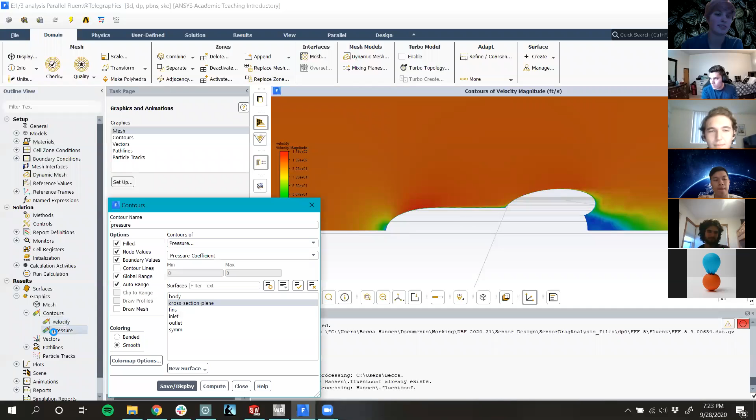We can look at pressure. Again, that stagnation point is going to have high pressure, so this looks all right. Visuals are making sense, but when I go to read out the drag force and drag coefficient, it said it was practically zero. So I've got to work on that.

I don't know why that's going on. Define zero practically - the drag force was like 0.001 or so, pounds. I mean the drag coefficient, not a ridiculous CD naught - CD naughts are usually in the point something range. No wait, that was the force, 0.00 something. Okay, that was the force.

So I'm expecting the drag coefficient to be - well for an airfoil it's going to be like 0.09, right? But this isn't an airfoil, so I don't know, maybe 0.1 to 0.2. Well, airfoils have to generate a lot of lift though, and this doesn't. Well, but the CD naught for an airfoil is really low - the induced CD is higher. Well, even for a symmetric airfoil...

Yeah, at this point I don't know if we're talking CD at speed or CD naught, or if we're streamlining. Well, for a non-lifting body, it should be the same. Yeah, maybe? I'm not saying it's not broken, I'm just providing reference. I don't remember the exact numbers, but it was silly low, sometimes like e to the -5 order. I was like, no.

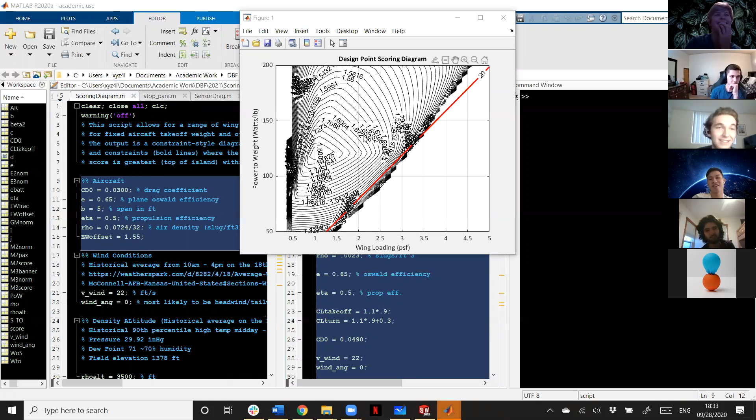Come on, this computer, you can do it. Yeah, it's trying its best, man. This is what I'm working towards.

On the x-axis here we have wing loading, which is basically how much weight the plane has per square foot of wing area. On the y-axis we have power to weight ratio, which is how much power the propulsion system generates per pound of the plane.

Does wing loading, weight per area of wing, take into account the load factor? It does not. The wing loading in this instance is unrelated to that.

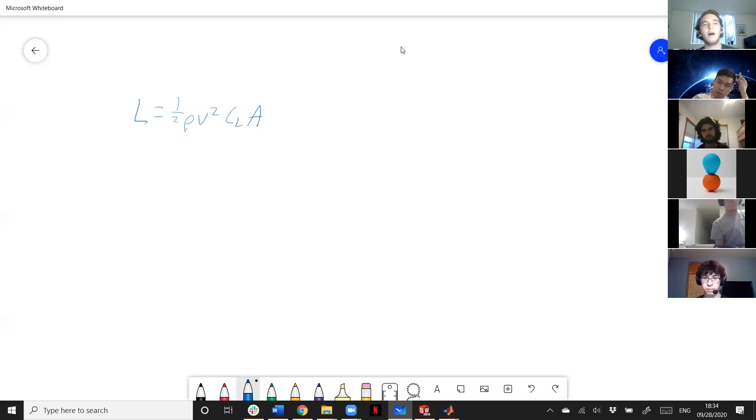That ends up making our equations easier, because in steady level flight we have lift equal to the weight. And so our wing loading ends up being, I guess I should use S for area because that's what people do, a pretty important parameter outside of the context of pulling G's and stuff.

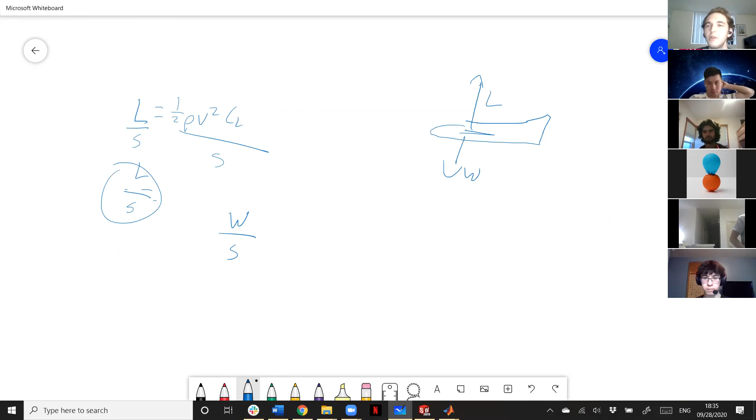So the load factor is only for structural people? The load factor is only for structural. The load factor also comes into account.

No, I don't want to handwrite my MATLAB computer. In some of these scoring functions we have this weight estimate code, which is meh. Also if we end up doing like not a typical balsa buildup, it's pretty useless because it's meant for a balsa buildup. But it comes into account when we...

Sounds pretty fake. It's a little fake.

The load factor comes into account in this code when we estimate the wing weight. Scoring analysis is a lot of fake math until you get something that makes sense, and then you can check it and be like, oh yeah, that works. Which is why it's taken me a minute to figure out what the hell is going on.

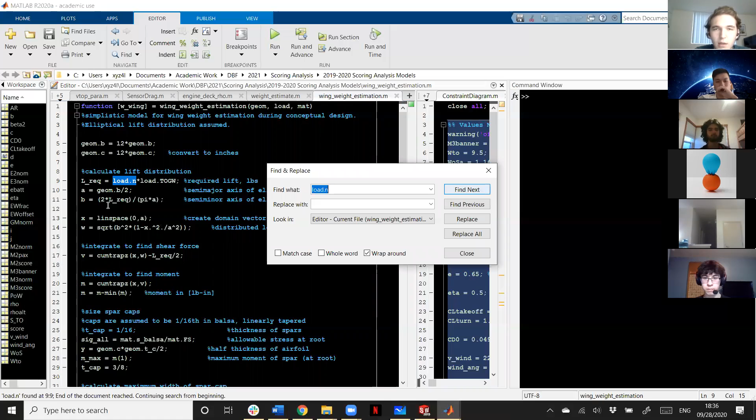The load factor comes into effect here for kind of just a rough estimation for how much force you're going to need on the wing. And so a rough wing buildup just gets a ballpark weight.

Load factor, that's like how many G's you're pulling in a turn. And so it's going to be how strong the wings and everything else needs to be. Because if your wings are only good at steady level and then you try to turn, there's more stress in your wing and your wing snaps.

For 121, I don't 100% know what you guys are doing with 121 if you're actually making stuff. But if you're making the gliders for 121, have a continuous spar so that your wings don't snap.

Affirmative, learned that one from experience. If I remember correctly, you learned that one from experience, Laird. No, mine snapped on crashing because we did something different, and different is bad.

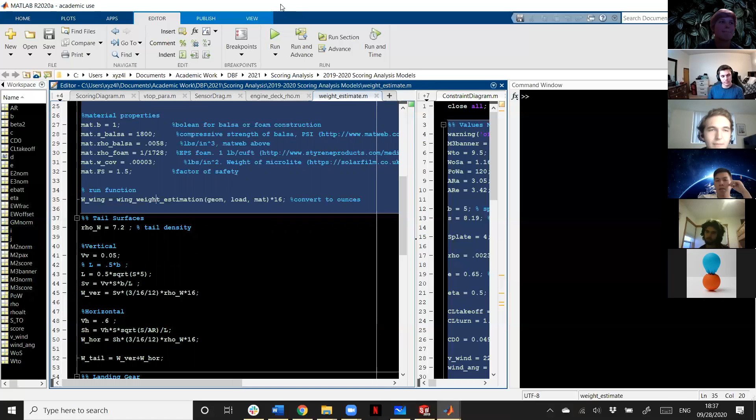Unless you want your wing to snap as a design feature. A rapid disassembling aircraft. If you want a slow takeoff speed, then once you accelerate past a certain point, the tips fall off. We're getting dangerously close to blade of wing territory, or the slip wing thing.

And then the other thing I've been working on, more so before the beginning of the year because I've been sidetracked by scoring analysis stuff, is... what the heck.

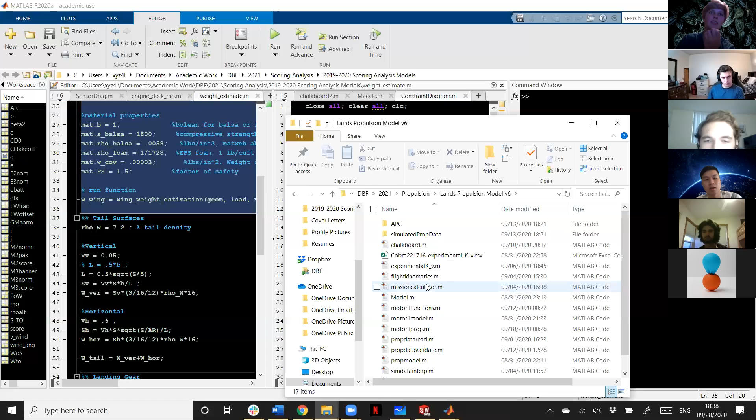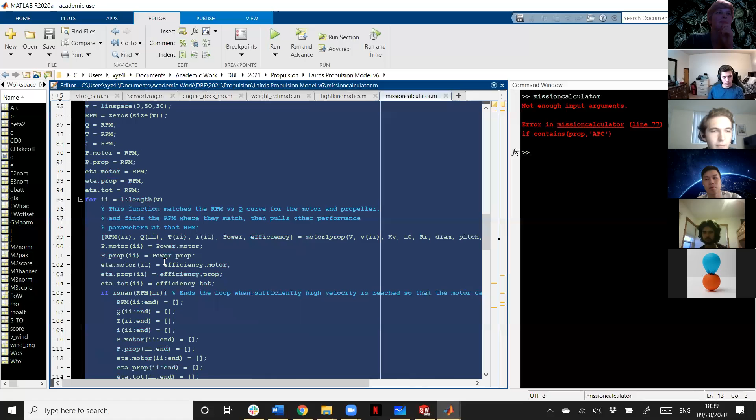This is my propulsion modeling. Never mind, I'm not going to run this because I have everything set up for scoring right now. But it's a preview for what we'll talk about at the propulsion meeting on Wednesday if you're interested. Much code, which if you don't know MATLAB, I can probably use propulsion as a jumping off point to get you started with that stuff.

That was a little more involved than updates usually are. Indeed.

Does anyone else have anything to share with the class?

No, nothing on my end. Jake, anything on your end? My end is dead.

Okay, me too. Sam, do y'all have any planned new tasks? Anybody?

Something, start the proposal. I'm not sure we have any content for that, but I believe in you. Didn't you say you were interested in AVL? I'm not sure if you could start learning that before Laird finishes scoring analysis. Probably, like do planes or analyze what happened last year. And then I'm not sure if it was Cody or somebody else who wanted to also jump in on that. But yeah, if you find the time, getting familiar with that before we need to use it would probably be good.

Okay, does everyone have SolidWorks up and running? Should we open part or assembly? It'll be a new part, I think. You could always just flex and make an assembly and then make a part inside it though. I mean, that's not flexing, that's just how you do it for complex assemblies. Complex as in top down? Well, yeah, but top down is only useful for certain kinds of assemblies. If it's just like two parts together, you're probably not gonna benefit from a top down. But you do you, bro. To answer your question, it doesn't matter.

Okay, I guess I'll start screen sharing then. So if you missed it, last week we didn't get around to starting on the actual pliers tutorial because nobody had SolidWorks, because everyone's a noob. So yeah, I just went over a brief overview, talked about all the different kind of tools you can use. Wasn't very in depth, but I was like, this is a revolve, this is a loft, these are things. So that's that.

Okay, so this is what we're making. There's gonna be, how many parts do we have? Okay, I guess we've got 3-ish parts. So we're gonna start with this guy. So you can do new part.

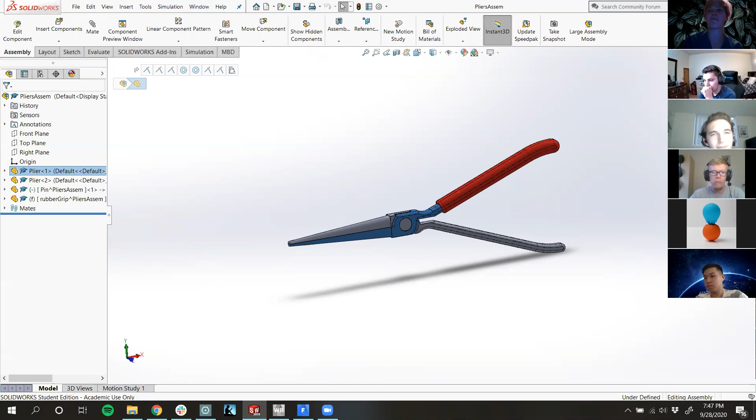Remember when I emailed everybody the thingamajig? Did y'all get that email with the part? Now I gotta find where I put that. It had the other people's names included because it was a group email. I'm sorry I missed that, but can anybody let me know if you don't have the part?

Okay, so is this what y'all's part looks like? I should make it so I can see everybody. Just a little bit slow about this. Okay, I'm gonna imagine that we're good to go.

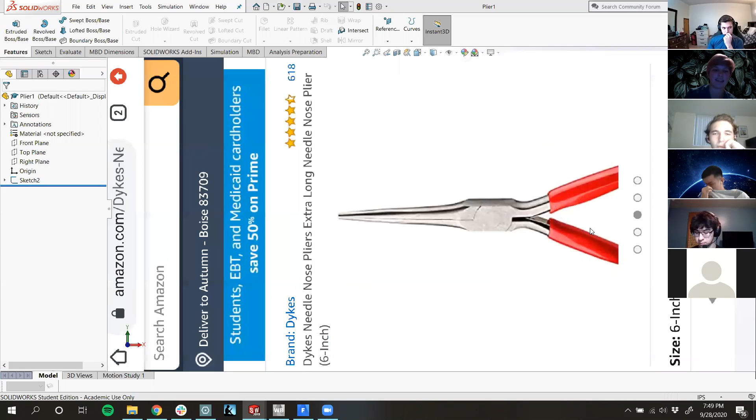So I imported this image, and we're just gonna trace it to start out. Would it be useful if everyone screen shared? No, I think everyone can at the same time, just one per, so I can know how y'all are keeping up. This image is technically on a sketch, so we can just start a new sketch on the front plane. That's a good place to put it.

This origin point is at the pivot where they scissor, so you can outline the pivot there. I'm gonna do another circle that gets to that edge, but I'm gonna make that construction geometry, so it's not gonna go all the way around. I'm only gonna trace this part of the plier because you're just gonna duplicate that part later and it's all gonna be good to go.

So we can make this arc starting at the center, and over here it shows you the different kinds of arcs and how you can use them. It says first the center, then point, then point, kind of.

Is anyone confused yet? I'm sorry, was that a nod from Larry? Did you cut around the edge of the plier again?

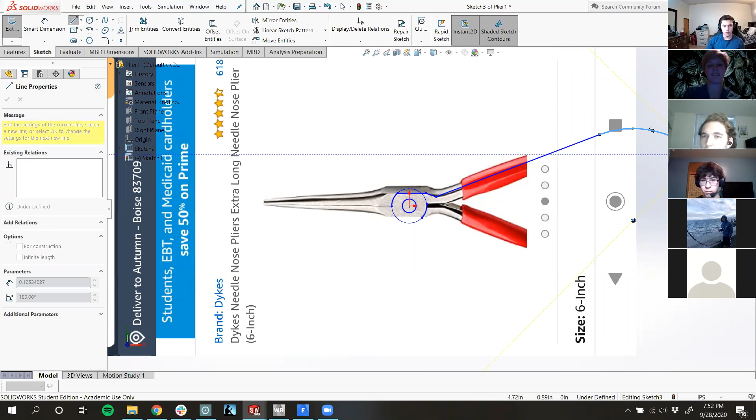Also, when you're drawing straight lines, you can come off of the point and it's gonna start to make a straight line. If you bring it back to the point, it'll make a tangent arc. So that's something, that's a good tip. Yeah, that's a good place to put it.

Can you repeat that tangent arc thing? Yeah, it's just a quick little bit, you can do the arc and then set the tangent, but it's a little bit quicker. So you draw a line, put your point down, go to draw another line, and you just bring it back and that is an arc. Interesting.

Hot tips by Becca. Okay, and we can keep tracing. That's the moral of the story.

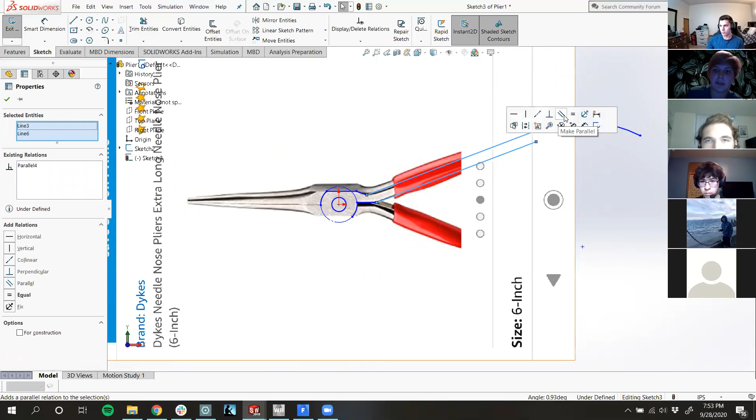You're gonna want these parallel unless you want your thing to be janky. Oh why is it? Okay, so you click, control click, parallel. And then we can line this up, center line is another way of accessing construction geometry. I'm gonna set these two perpendicular to line up those points. Oh, go back, I lost my pretty picture.

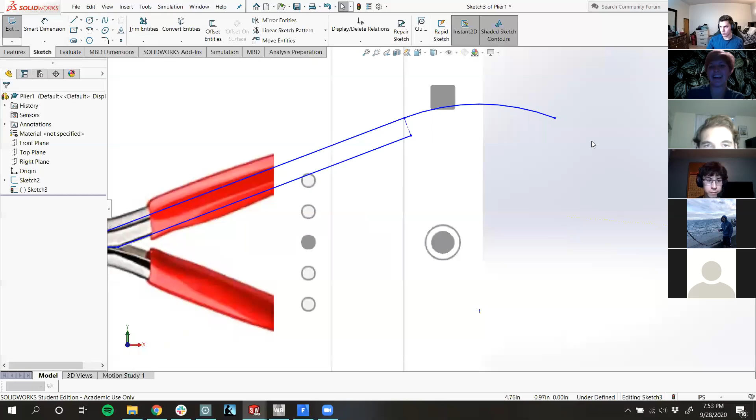Maybe that's what I want. So usually you would have better geometry than this, and these dimensions would be important, but for the sake of it, we're just tracing. I don't think it's important to do this stuff.

Okay, so if you wanted to manually do the tangent arc, because I let go of that point, I'm gonna have to do the arc here, and then we want these two to be concentric, to line them up. Oh dang, no. He's not happy about that. Let's try it again.

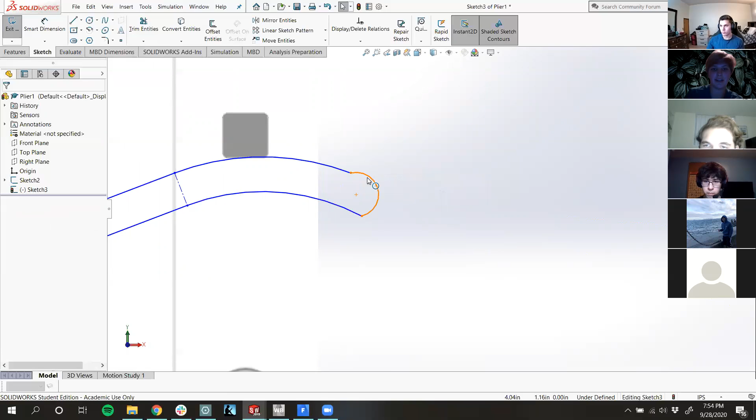Okay, and then for good measure, let's put another one on the end. It really is easier working with a quick little trick there instead of what I'm doing. Okay, pretty handle, how are we doing?

I don't know if everyone's caught up or needs a little more time. How did you get the circle at the end of the handle to line up with everything else? I missed that. Yeah, so I just put another arc on it, and you want it tangent to both of the lines.

Matthew, were you the one that said you've already done CAD before, but not SolidWorks? Yeah, only done Inventor, and a bit of Onshape. Sorry, you were quiet, I missed it. Yeah, I only did Inventor and a tiny bit of Onshape. Okay, cool.

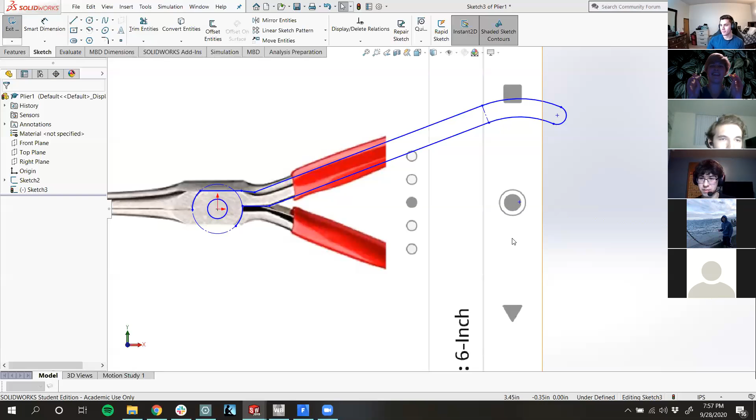I really have no idea how long this takes because it's been a while. I guess I technically started doing this four or five years ago, maybe, and I've spent way too many hours looking at it. So, oh no, just kidding. Wait, yeah. Okay, hold on.

To fill this space, somebody I think intentionally had their sound on during one of my lectures today, and it was, I think it might have been like a TikTok or something. There was this lady saying 2020 has the lowest school shootings so far, way down from previous years. And some kids said, that's because there ain't no school. What are they gonna do, shoot up the Zoom meeting? Everyone was so shocked, nobody had anything to say about why somebody was playing memes in class. The professor didn't know what to say. I guess that wasn't really a funny story.

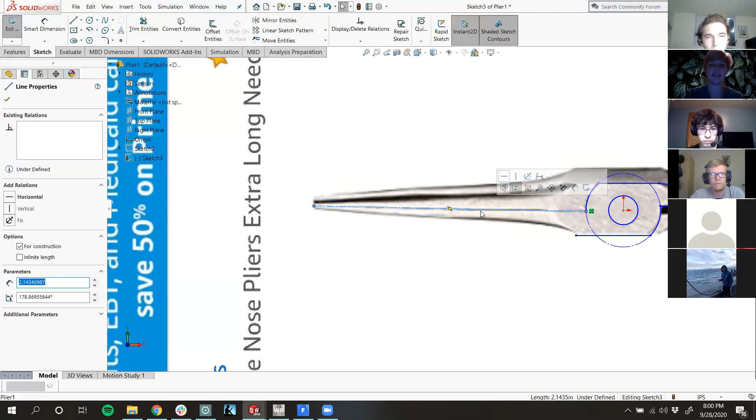So the next thing, we don't actually want to detail this nose because we're gonna do that in a loft. But I'm gonna extend it out here, and make sure it's horizontal. If you want to be quick about it, the pop-ups of what you need always come up to the right, so use that, because you can go all the way to the dialogue over here, but that's slow. So that's just going to set the point where the loft is going to end.

I guess we need to close this shape. I'm not sure if that's how I did it, but... How did you get that line to come out so fast? Which line? The construction line. What do you mean, where did it come from? Did you just make a line? Okay, cool, never mind, I thought that was the thing you said. It comes out to the right, and there's a button to click. I was confused. No, I was talking about making it horizontal there.

No, so in the new version of SolidWorks, you can actually send brain signals and it pops up. I was wondering, yeah, it goes over there. Gotcha, and then you just check the checkbox. You're like, yes, that's the power of 2021 SolidWorks, Slade. Oh shit, no I'm not, shit, I got the old version.

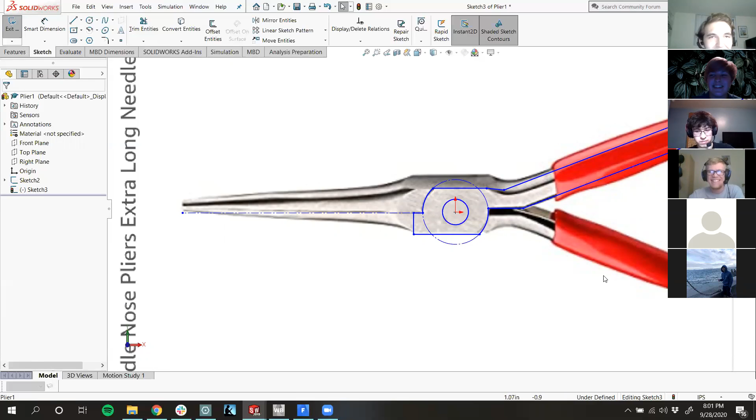I forgot to update mine, so I'm not even on the new version anymore. But okay, so also,

Does anyone see anything wrong with this sketch? It needs more dimensioning, there's zero dimension. The blue means it's not dimensioned. It'll turn black once it's totally fixed. So I'm going to see if I can fix everything.

Did it work? Sounds like a big burden. I'm a cheating McCheaterson, I just told everything to fix. So usually that's terrible design practice for anything you're gonna try to modify.

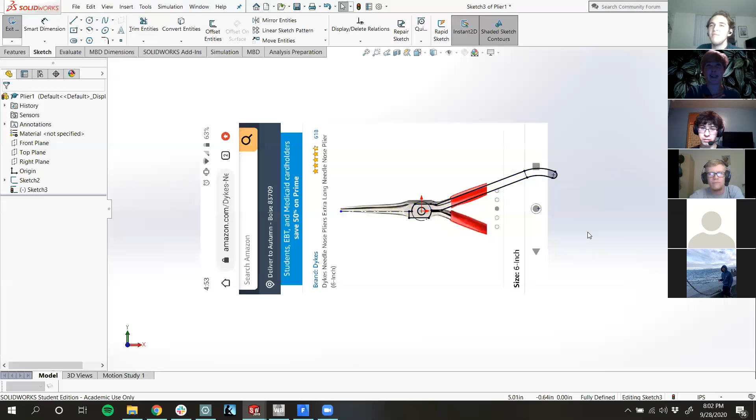Every time you're working with SolidWorks, you want to be thinking about which dimensions you're probably gonna want to change later in later iterations. So yeah, you want to do it well. A lot of people will say just dimension everything off of the origin, but you should dimension everything off of what makes sense.

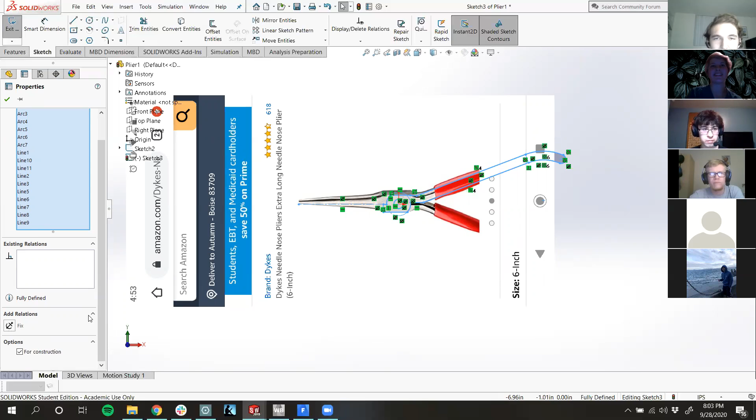Dimension by geometry rather than numbers when you can. But since this is just a pretty picture that we're making, what I did, if you missed it, I selected everything with this, and then relations are over here, and I just said fix, which is cheating, but that's what we're doing today. All good?

Now it's the exciting time. So we're in this sketch tab thing over here, ribbon, I don't know what they're called. We're gonna switch over to features. Since we're still in this sketch, you could exit the sketch and go to features, or if you go to features, it'll automatically input the sketch instead of having to say, oh, I want to work with sketch 3. It'll say, oh, you're working with sketch 3.

I see, we're going to do extrude boss, which is just like the most simple thing, like a rectangle, you know? So we're going to rectangle that.

So I'm going to do mid plane because of symmetry reasons. If you make your planes in funky places, then you want to save time later with like mirroring things. You want to have a plane that you can mirror it about. So if it's going to be symmetric or mostly symmetric, mid planes are good. It's not always necessary or important, but when you specify mid plane and then do the dimension, that's the full depth, not the halfway.

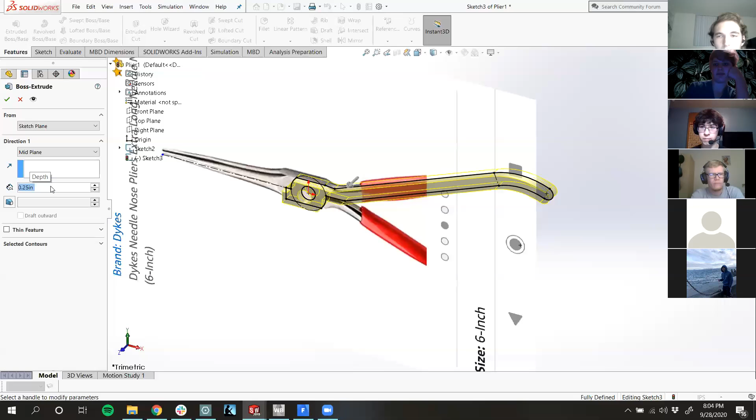I don't know, what does 0.25 look like? Sure, why not, 1/4 of an inch. Also, you can see your unit system down here, inch pound second, and you can change it from there. But if you forget and try to change it later, it will change all your dimensions in the inch.

Are we all good here? Y'all know it's saving time. Control S that before SolidWorks crashes, because it really do crash.

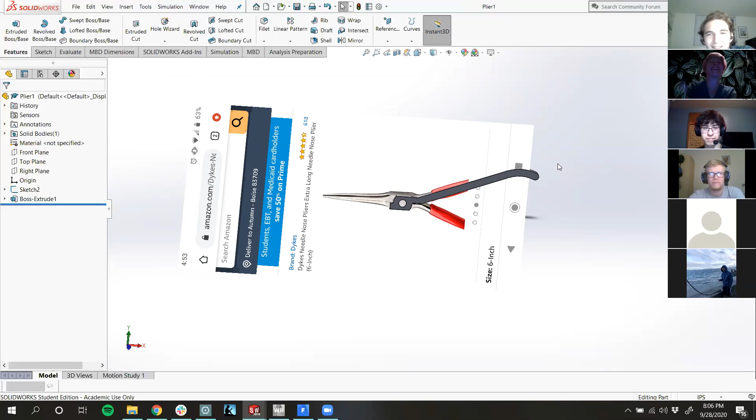When I was on robotics, the assemblies would be immensely huge, especially if you're working with an assembly that had electronics on it too. You always suppress, that was rough, it's impossible. We worked on all the laptops that HP wanted to throw away, and we'd work in this guy's garage. I live in Idaho, so it'd be freezing cold in the winter, and it's non-insulated, non-heated garage. So we'd be sitting in there and the fans would be blowing and it would be so hot, and we'd warm our hands next to that. It was insane, that was a disaster.

And I'm glad I have a computer that works now.

Okay, so now that we're here, this is no longer helpful, so it's on sketch 2, I believe. We're just gonna right click sketch 2 and say, go away. Now we can't see it anymore. So that's different from suppress or delete, that's just invisible.

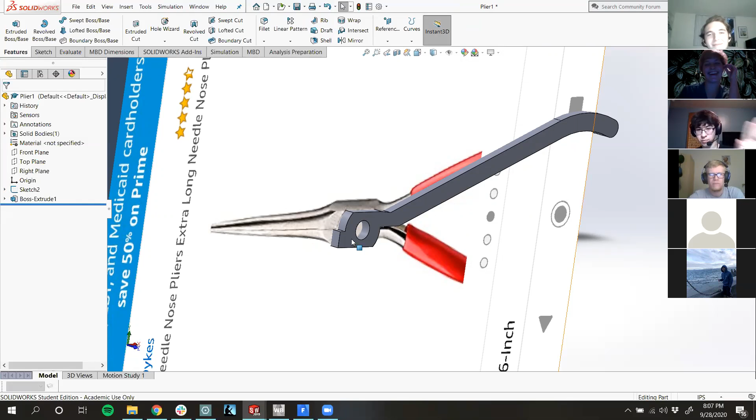Okay, now we want to make the nose. Maybe I should keep that up for a second because I messed this one up last time. The first time I made it, I made the nose upside down, and so they wouldn't go together because I'm an idiot. Okay, so we're gonna want the flat part on top.

Okay, we can remember this. Oh, wrong one. Okay, so Control 8 gets you head-on view. So now we're gonna want to start a sketch on this plane. So that little nice dialog box to the right, that's good, the sketch.

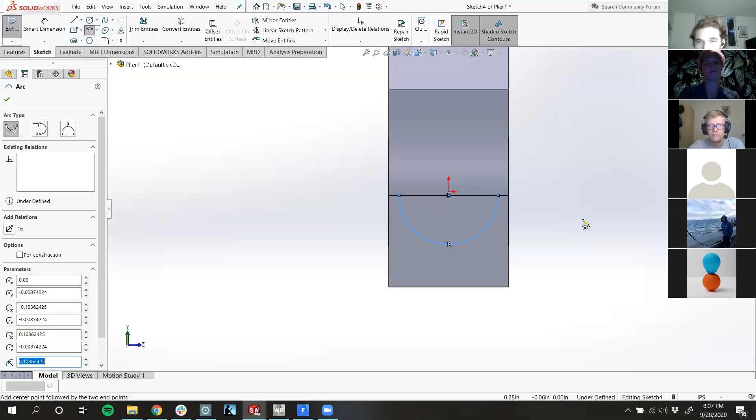And then we wanted an arc. So this arc is gonna start on the midpoint, so I selected that. It's doing good things, when it lights up all orange like that, it's making relations. Then we want this to fill the whole space.

And then you gotta close it, even though this line is there. So just to be extra about it, we could go convert entities and grab this line. Check, now it highlights this because it knows it's a closed shape. So that's if you want to use convert entities, or you could just connect it with a line. But how are we feeling?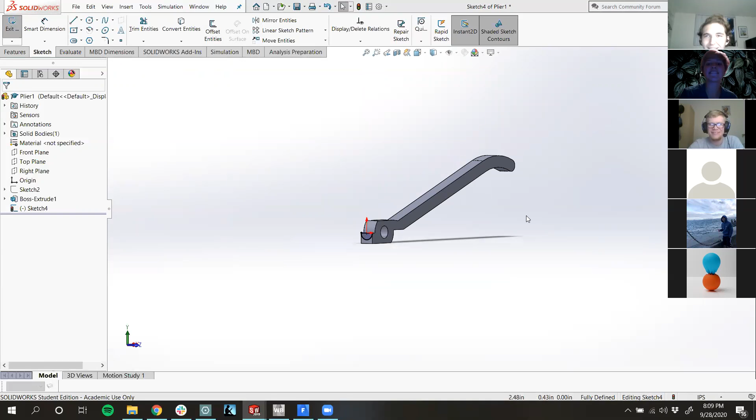Okay, how did you size that arc again? What determined the size of that semicircle? Yeah, so it's just a semicircle and then I made it tangent to the edges. Oh yeah, so that's an example of dimensioning without numbers. That'll update if I change the thickness and everything. So that's what I want it to be.

Okay, so that's a good sketch. We're just going to keep it like that because we are going to loft it, so we need the other loft sketch.

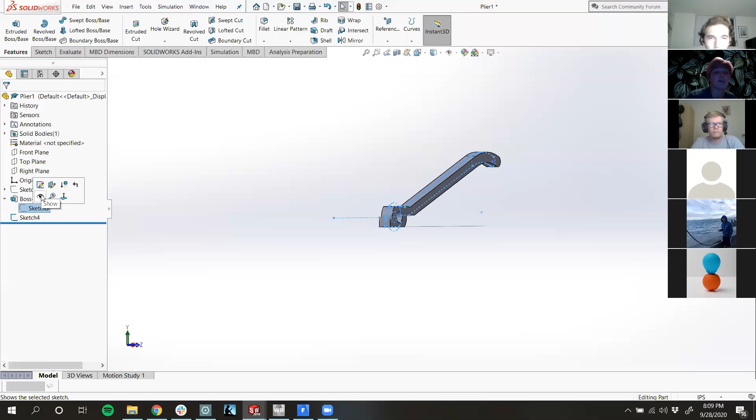Let's make this sketch. So you have the feature right here, and you click that little arrow, you get the details. We're going to make that sketch visible because we need something from it.

Okay, watch this part. We're going to go up to the top, insert, reference geometry, plane. There's also a button for that in the features menu. I like the features toolbar.

What did you say it was? Oh, it's over there, okay. Yeah, I just don't know where everything is. I'm sorry, I totally was not looking. Was I zonked? You literally prefaced it with 'okay, watch.' I was in the middle of something. He was in the middle of not watching.

Exactly. Okay, so the regular location is in features, all the way to the right, reference geometry. Otherwise you could go up here, insert, reference.

Pay attention, for anyone who hasn't noticed yet, everything in the toolbars is also available in the menus. And if you find it in the menus, you can add it to a toolbar if you end up using it a lot.

Clever. Okay, so references, I never actually learned how these work, so don't ask me, I just guessed. So we want it to be at the end of this point here. Oh look, it did it. Nope, it didn't do it right. Now let's try, what if it looked like that one? Now I think it's right.

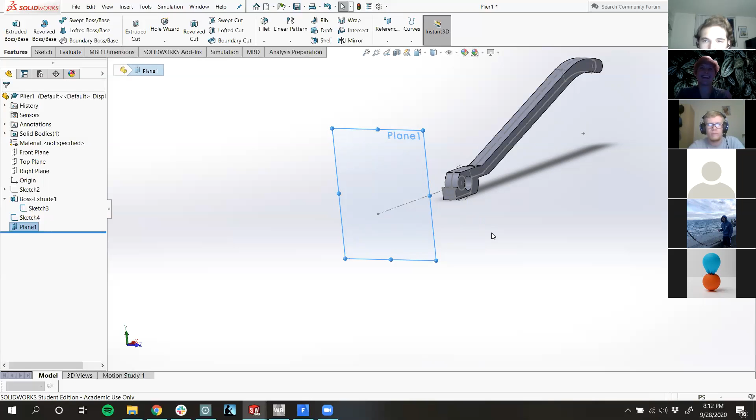Cool. Yeah, I learned this informally, I do not know all of the things. If you push all the buttons in SolidWorks, you'll eventually figure out what's going on. But eventually is a long time.

Right, speaking of not knowing what's going on, I am not here. Laird, make a reference plane that's perpendicular to the nose line on the dot. Okay, boom, done, we're there. Okay, now we're going to make a sketch on this plane.

Click on the plane, sketch. Now we're just going to do the same profile, but a little bit smaller maybe, because it tapers.

Close that. Now we actually have to define it. Well, we could just do what we did before, but...

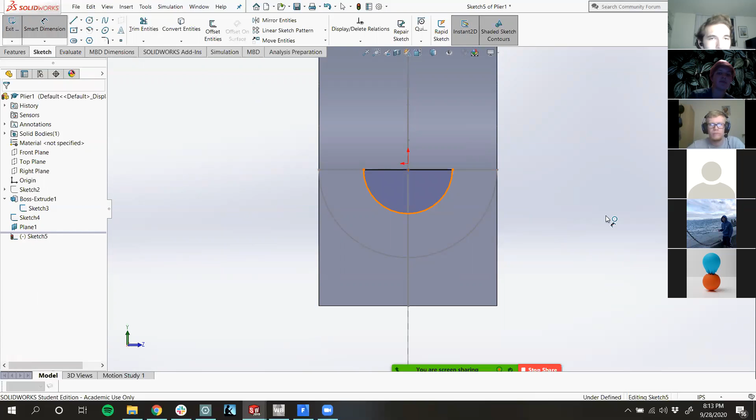1/8 inch diameter, that's something. Could be smaller. Yeah. Ooh, I don't remember a 16th. Me not knowing my decimals. Why did that not change? Oh, 32nd. That's really small.

Anyway, wasting time. Okay, so we've got 2 profiles. We're gonna connect those profiles with the loft. Also, I don't like this plane, so I'm gonna make it go away. Also, I don't need this sketch anymore. Go away. Okay.

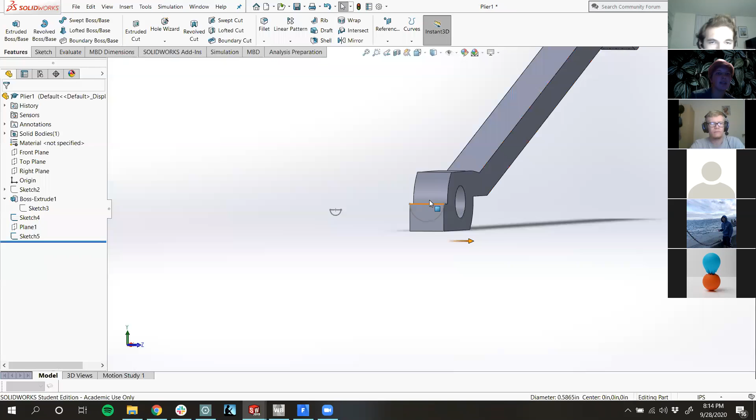So features, loft, profiles - we're going from this profile to this profile. Okay, so these zebra lines show contour, curvature stuff, and mine did it right this time.

Let me know if yours did not do it right, because when I made this before, it didn't do it right. If it doesn't do it right, you gotta give it a little more inspiration by giving it guide curves, so it has to fit the form to whatever curve. It can be 3D curve or whatever. Sometimes it also just means the corners are in the wrong order and it's trying to cross one side of the thing to another. And if you make a feature intersect itself, it doesn't like that.

Okay, does everyone have their loft? Really not getting response. Okay, Laird's good to go. Yeah.

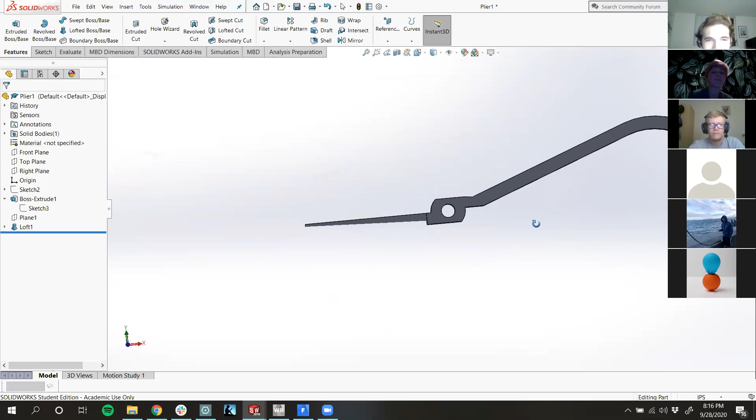Nice. Okay, so now we've got this ugly thing. Okay, so do we want to fillet it now? No, we want to assemble it. Save that. Okay, assembly mode, file, new, assembly.

Now we're gonna insert - you can pin it if you're putting lots of them in. We're gonna put 2 of them in. Okay, and then we're gonna put another one in. And these are directions if you want to change the orientation right away.

Oh, no, that's not how it goes. I guess my spatial thinking is a little off - okay, that's what we want. Nice. So it's gonna fix the first one you put down. We don't like that, so we're gonna... are we all here?

Okay, so right click this, so it fixed it. We don't want that, we're gonna float it. Now we're gonna mate all the planes together, because that's good practice.

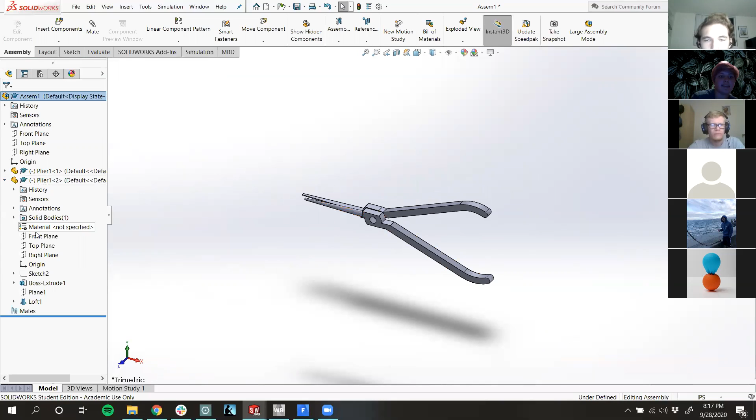Front plane to front plane. And this is mating quick, it brings up a little dialogue. Yeah, top plane. Always mate by planes when you can. It's good. Good stuff.

Okay, so now it's fixed in the way we want it. You try to move it and it says, don't, you can't move it. It'll also show you somewhere in the bottom, I can't see it right now, but it'll say like fully defined or not based on your assembly, but that's not usually helpful because usually you're gonna have something that is supposed to move.

Okay, we're gonna want these concentric. Gonna move - nah, I want that guy in front. Okay, so now we see that they're not gonna line up unless they're overlapping.

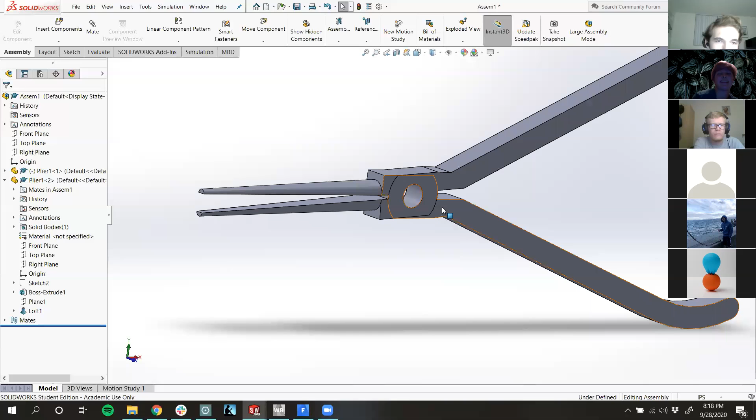Can anybody tell me how to make them overlap? Like physically, and not just be intersecting geometry.

Hi, Johnny. How long have you been here? The cutty cut thing. Oh, he's been here the whole time, but I think he's AFK. Oh, is he still gone? I done goofed.

Okay. My question was, can anybody tell me how to adjust these parts so that they intersect, so that they're all lined up?

Two questions. One, I had a question, Laird. You weren't paying attention. Yeah, I know you had a question, and I was paying attention. The question is about the question. Okay. Never mind. Sorry, excellent question - needed to stare at the part more, Laird. You personally have proven that there are no dumb questions.

Fair enough, it's true. Also, deep in that excellent question, there was a pretty good CAD nugget: sometimes you just need to stare at the part.

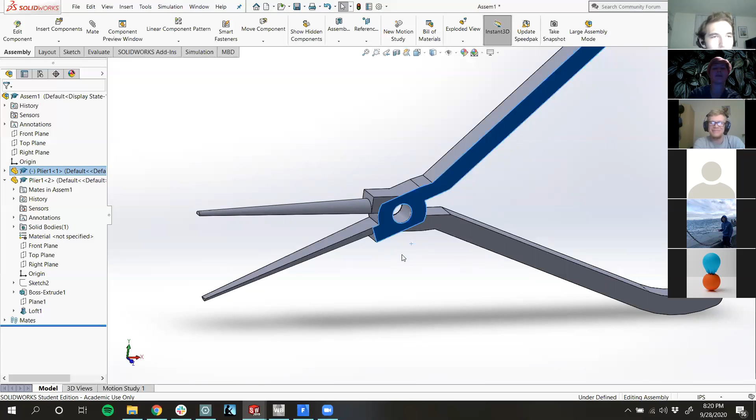Yeah, when I first mated these up, I even saw ahead that they needed to overlap, but I did it wrong. And then I mated them together, and then they were all sideways. And I was like, damn it. I guess I don't know how pliers work as a mechanical engineer. Failed - anyway, don't have a job, not engineer. Yeah, so this is also what I have done, and I'm trying to figure out how to get to the other way.

What is what you have done? I had them mated side by side and not overlapping. Well, I didn't... I guess I didn't exactly tell you to mate them, did I?

No, so we have to modify the parts so we can do this. You can't just mate them in place and pretend like it's fine. That was the plan, though. Nobody, Laird. We want these pliers to work.

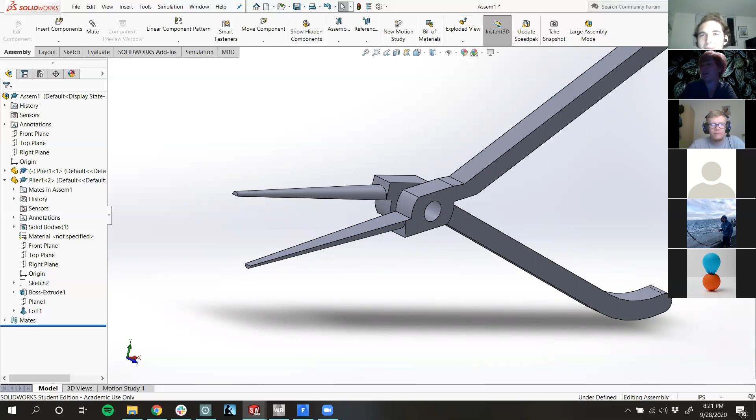Okay, let me remember. Let's just go back to the part and think about it. Okay, so this is the one that's in front, and so we're gonna cut part of this.

You see this rotation or circle? That circle exists because they're gonna rotate around each other.

Hi, Johnny, glad you're back.

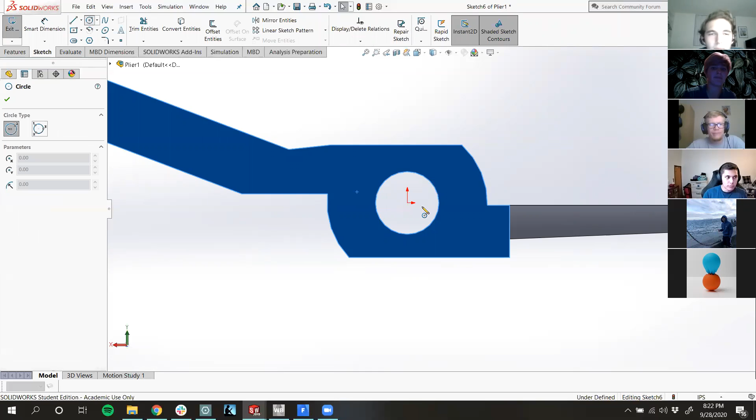So we're gonna start a sketch on this plane. Grab that center, match it there. I guess it's not fixed. Sometimes it lights it up and it's like, oh, I'm totally making a relation, and then they lie to you.

Concentric. Oh, come on, please. Concentric, why not? Oh, they're already concentric. Co-radial. Okay.

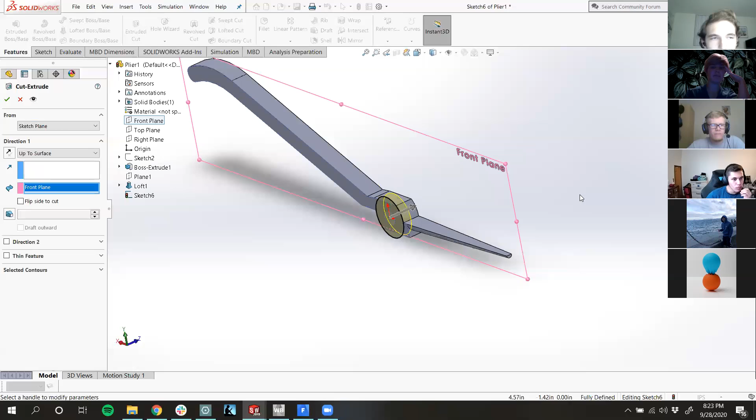And we're just gonna extrude cut halfway. So you could define it by numbers, or we could do up to surface, surface being its own midplane. Isn't that clever?

Now we got this little recess where the other guy's circle can circle. Okay.

Are we all good on that one? It'll make - oh, wrong one. It'll make more sense once we put them together, right?

So now we can make these two surfaces coincident. Now they line up and they go like this.

Oh, why are you fully defined? I thought it was the other one. Oh, I just did it different this time. Okay, that's fine. Right, everyone there?

Okay, well, I'm only going to listen to the people that give me responses from here on out. So Cody's good to go.

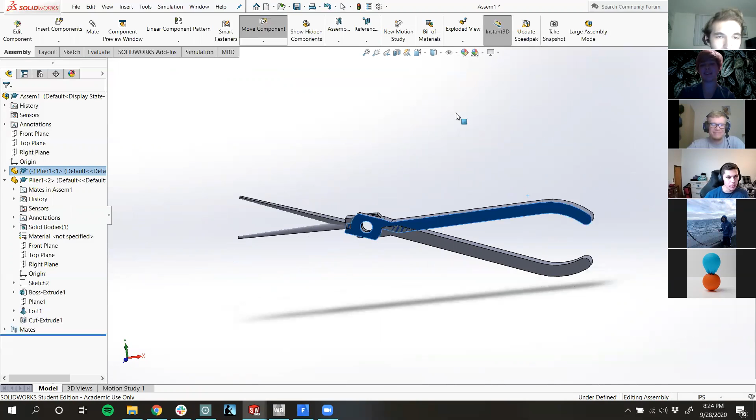Okay, so we're looking at this and we want the pliers to work, but this is not how pliers work. So we're going to put a limit mate on it.

Maybe not your pliers. My pliers work like that. John has the magic pliers. Johnny, I didn't ask for your sass today. Thank you very much. Okay.

So we're going to go to the mate tab right over there. Mate selections, let's do - well, we could do the draws or we could do the planes. And since I'm preaching the gospel of plane mating, let's do the planes.

Okay, planes. That wants to make them coincident. We do not want to make them coincident. So it's under advanced mates, and then this little thingy probably.

So we want to set the small distance to be 0 degrees, and the big distance be, I don't know, how big do pliers open up? 45 degrees maybe? Never big enough.

Well, you can make yours open really wide, but when I first made them, when I made my first model, and I was like, 'Hey Mom, look, I made pliers,' and she was like, 'Those open too far.' I was like, 'Okay, Mom.'

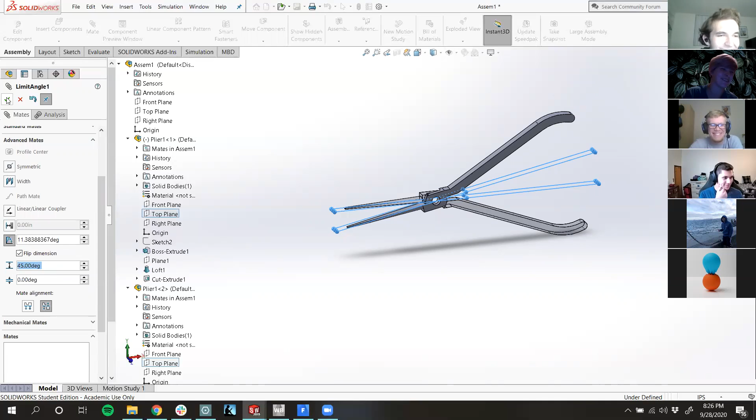So, there, ta-da! Now it closes, opens. Isn't that nice?

If we wanted to be extra about it, how did we do this again? We could get rid of that. Oh, so this says little traffic signal. It's like, whoa, calm down.

Control B, rebuild. Okay, so sometimes you'll put in new numbers or new stuff and then it won't update the visuals for it until you rebuild. So...

I'm gonna get rid of that one, so I don't want it no more. And what I'm instead gonna do is, wait...

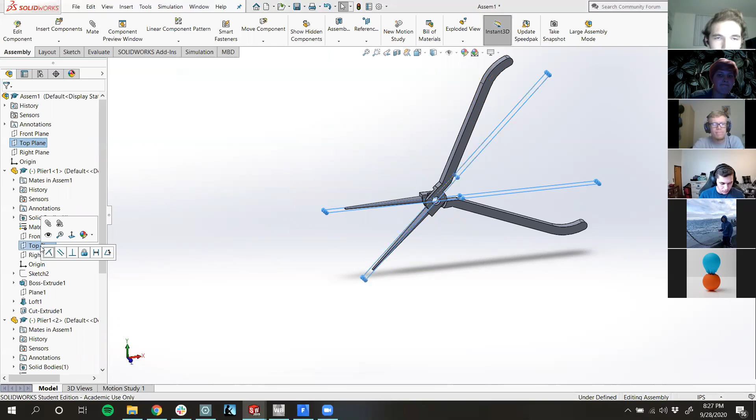I think this is maybe correct. Am I doing this wrong? Oh no, I was gonna make it be horizontal and then you open it, but you know, it doesn't matter. I'm just gonna put it back. Okay, anyway, all is well.

I should save this. Okay, are we good? I guess I wasted a bunch of time.

My pliers are opening backwards. Success - like the top one, when I can't open them up, I can only push them down. Okay, like through each other.

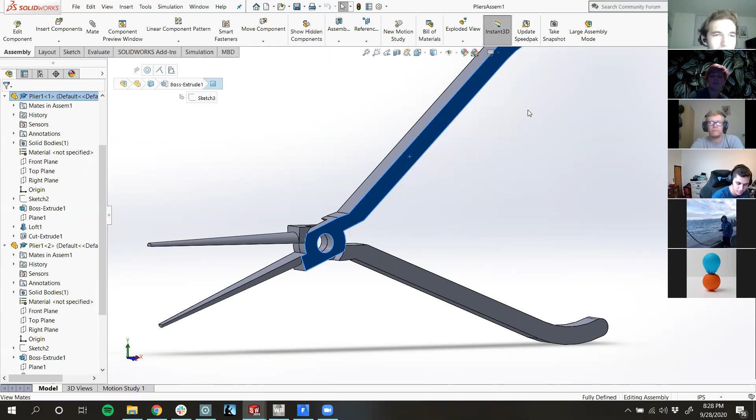I'm not sure, you have to reverse the direction of your angular constraint. That flips one of them, not upside down all the way, like there's two ways to reverse it. One of them switches which faces are trying to be next to each other, and the other one just switches which way they can move towards or away from each other.

And if you ever want to modify your mates and you can't find them, if this list gets really long, you can right click on your part and be like, what are all the mates over here? And then you can see the mates, and then you can be like, let's modify that one.

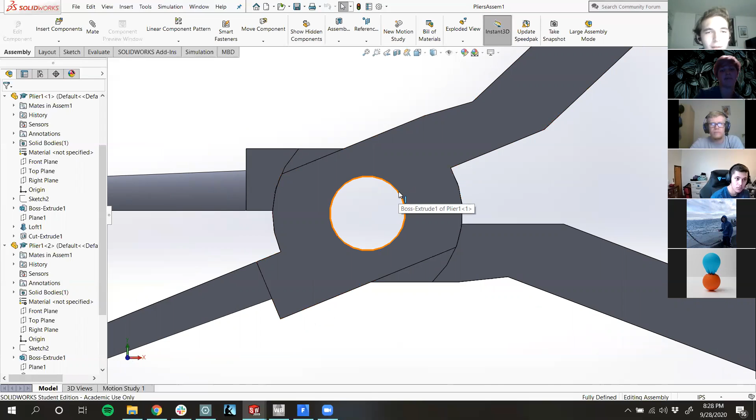So now we're going to be super baller and make a top-down assembly part. Just one, because I have no idea what the dimension of this circle is since I didn't set the dimensions. So what I'm gonna do is insert components, but from the drop down, choose new part.

This just puts it down somewhere. And then it makes, where'd it go? It makes a new part over here. Where'd it go? Oh, part 2. You can rename it, and if it doesn't let you rename, that's something in settings, and I'm not sure I remember where it is, but it's in there. This is going to be the pin.

So now we're going to click on this one and do edit part. You can also open the part, but we're going to edit it in assembly mode. This part doesn't have anything yet, so we're going to make a little sketch. It put the origin in the right place, which was very nice of it to do. Edit part is supposed to come up when you right click on the thing in features.

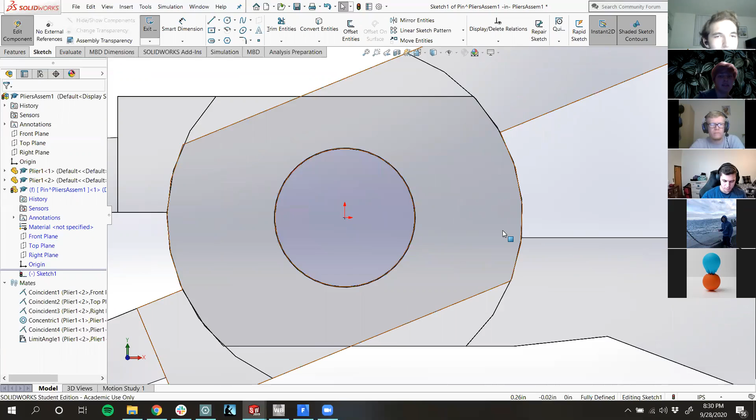Okay, cool, so I'm gonna make those co-radial because there are no tolerances. And then we can do features of that sketch, extrude that, shifts it over a little bit, so don't freak out too much. I'm gonna change that direction. Let's do up to surface because we love external references today.

Now we have a pin. Oh, damn it, the plane started where I didn't think it would start. So we're gonna have to float that again, because if you put something new, it wants to do the thing.

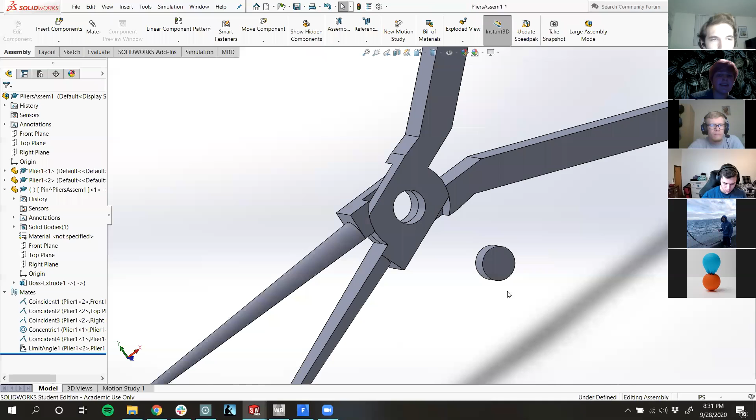Concentric. Now, also if you want to - oh, just kidding, it is the right size. I was gonna say it's not gonna be the right size, but if you want to see the distance between something, these faces, it comes up - this little zoom thing is in the way. Okay, normal distance, 0.125, or I added the hotkey. I don't remember how to add hotkeys, but you can look it up. I always do Control M. Why is that not coming up?

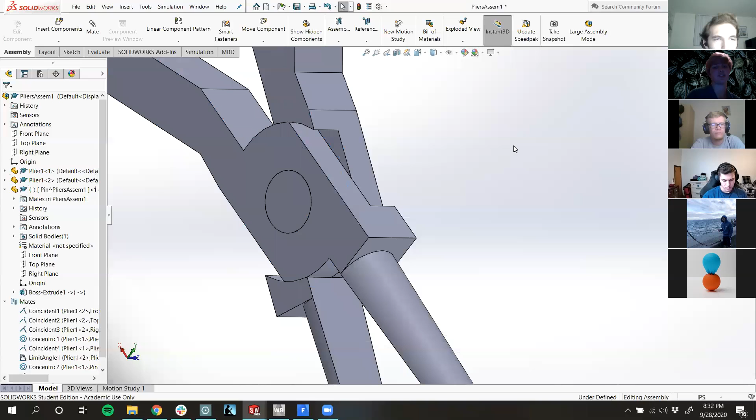Okay, yeah, and here's your measure thing. You can change what type of measurements. It's not relevant here, but you can specify where you're measuring from. You could also do projections when you measure things - they'll give you the area and stuff, and then you can say project onto, and then you can click a face. I don't remember, I did this very recently once for a thing. It's for like finding your frontal area for drag things and stuff.

Good stuff like that. Are y'all bored yet? Okay, good stuff.

Okay, so now we have functioning pliers. I guess we can make them pretty now. Do you want to make them pretty? We can go back into the plier part. Move that back down. Okay, so fillets - put them everywhere.

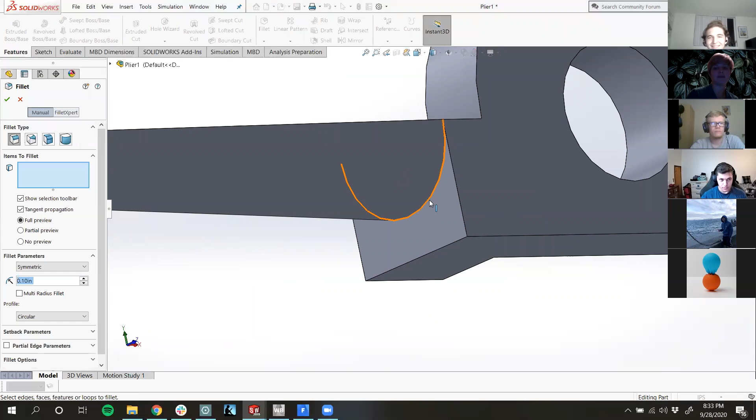Sometimes it doesn't want you to put them there. I think you - say fillet? Yes, fillet. Legally, they're called fillets. No, I believe they are in fact. Legally. No, they're fillets, it's the law.

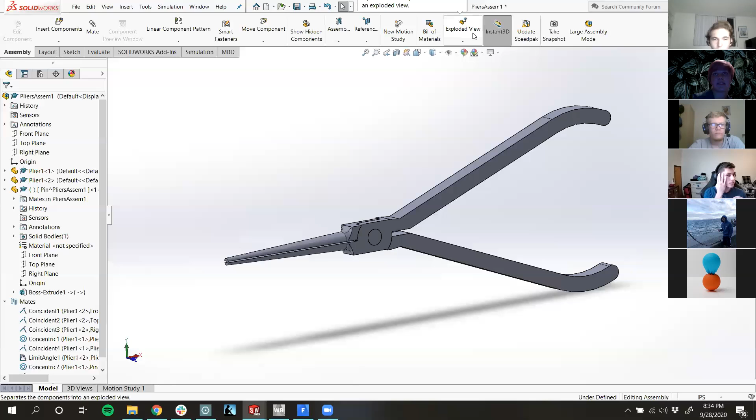Yeah, so ideally don't have a million different - I don't remember how these fit together, let me look at it again. I'm wondering if we can put fillets over there. We cannot, because those close. If you want to fillet the heck out of your thing if you can, keep the number of fillets to a minimum. But sometimes it'll be like, you can't fillet both of those edges in the same fillet because it can't figure it out.

SolidWorks is dumb. Okay, back to it. So it tries to autofill your fillets sometimes. That looks okay, why not?

Let's do it again over there. Oh, just kidding, no, I don't want to. I'm gonna mirror them after this. No, that won't work. That won't mirror it.

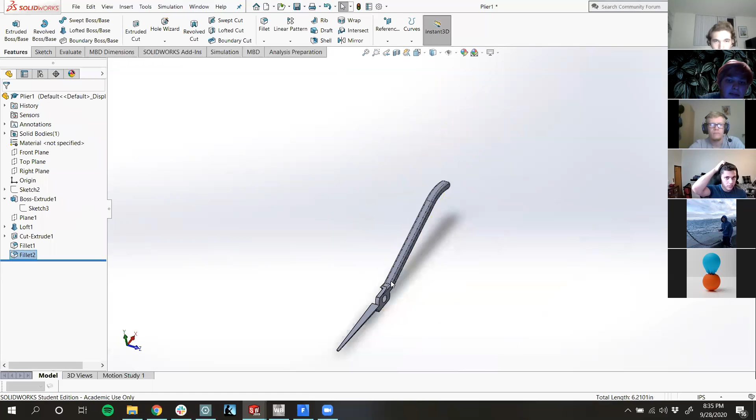This gets exciting sometimes. Let's see what that looks like. Okay, that's not too bad. I don't know what that's about.

Well, that's something at least. How are y'all feeling about your fillets? Are they pretty? That would be a bold statement.

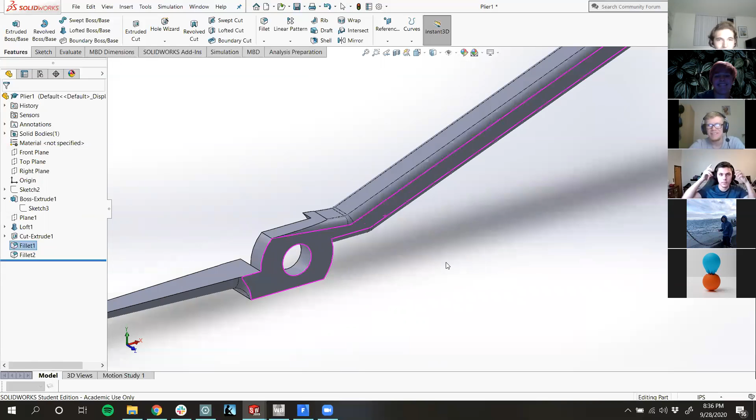It's fun making 3D printed parts because then you can really fillet the heck out of those and make them the roundest things you've ever seen in your life, because otherwise they will very much break.

Are we good to move on to the hard part? There's only one thing left, I think.

I could just take a nap if y'all need time. I'm chilling. I haven't done my fillets, they're weird, but I've done them before so I can figure that out later. I just don't know how well this surface offset is gonna work if you don't have rounded edges. It might be weird, but it'll probably work.

It'll probably work. Okay, so let's do the hard part. Let's go back to assembly. No, that's the finished one.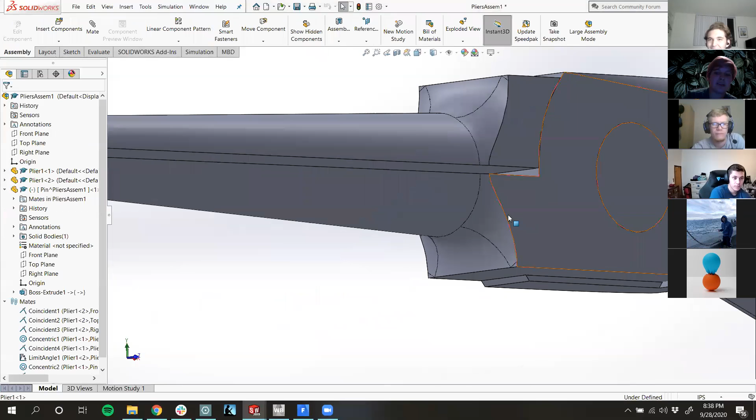Ooh, that's interesting, I made it different before. This one is super dumb because I wasn't paying attention, I wasn't looking at the picture. That looks super dumb, doesn't it? What's with that? What it's actually supposed to look like is that. So instead of having a semicircle, it was a semicircle with that rectangle added on the bottom there. The picture has it taper down into the nose, it's not just a straight corner.

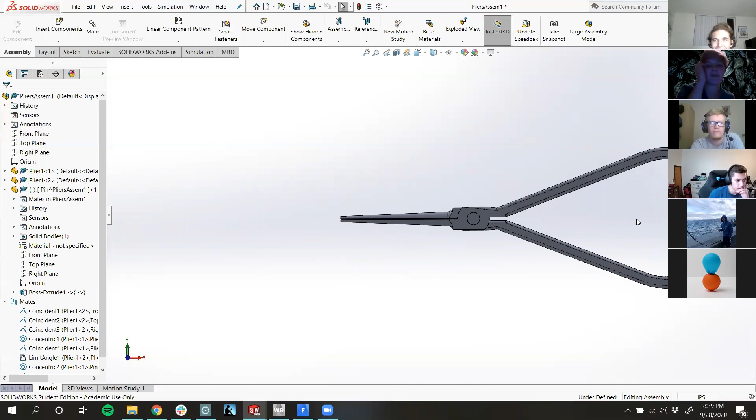Yeah, both of them are approximations, and all models are wrong. But yeah, what can you do? This is one option, it's not the good option. I like the other one better. It's not a very good taper. The aesthetics of these are...

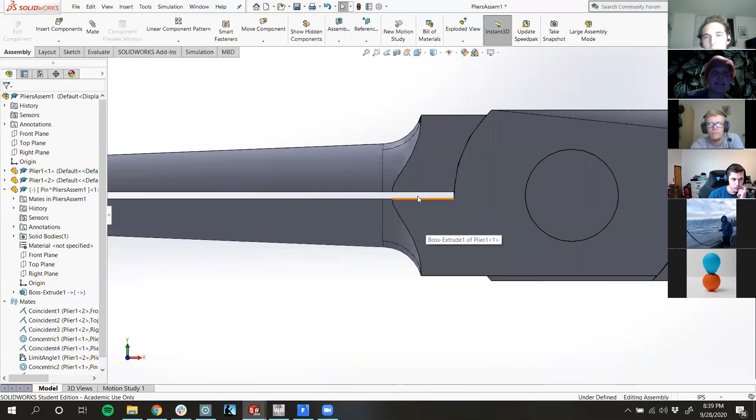Oh, why don't you want to move? Did I do that wrong? Why is it not... Huh, okay, so I guess when I drew this first little part, I didn't quite get that horizontal. Let me fix that. Is anyone else experiencing this little gap here? Well, I'm gonna go fix it, that'll be over here.

So my first sketch. Ooh, don't do that, this might be difficult to modify since I fixed everything. Yes, this is why we don't fix things.

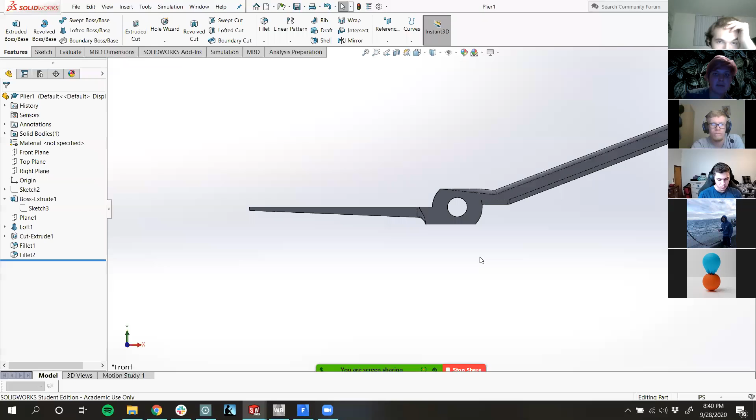So back to the assembly then. Is it still bad? Just in a different way? I don't know, well, anyway.

So we're going to insert a new part, put it down somewhere, and rename it. Let's call this skin or grips, the little red things, the little soft stuff. Also, if this were a real project, we'd want to be specifying all the materials so we can get the right CG and weight estimates for all the other calculations people do.

And you can do that in the part, material not specified, then modify it over there. So it's a good thing to do.

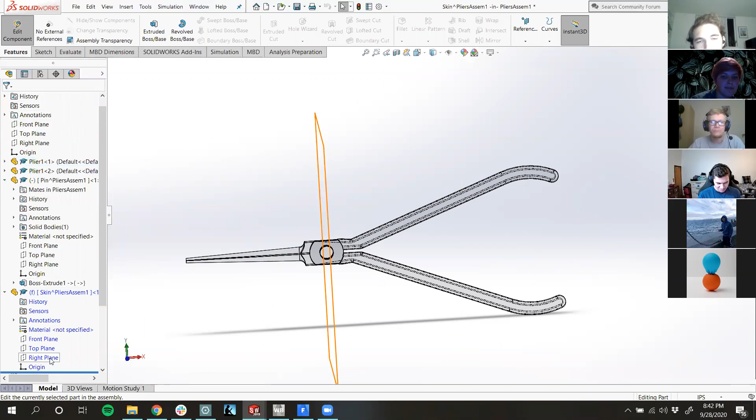Okay, edit the skin. How did I do this? I totally don't remember how to do this, so I'll look it up.

Surface offset. Okay, so surface offset. Insert surface offset.

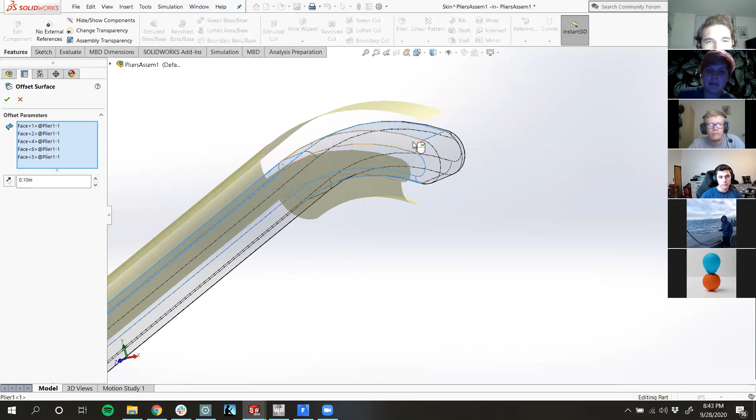Gorgeous. Okay, offset parameters are going to be all of the surfaces, so now it's fun times, you got to click all your surfaces. And the offset is going to be 0, and then we thicken it just like I was reading in the thing, if you're following along, SolidWorks forums.

Ooh, no, I shouldn't do that. I was thinking about making both sides of it in one part, but then it wouldn't move when the pliers move, I don't think.

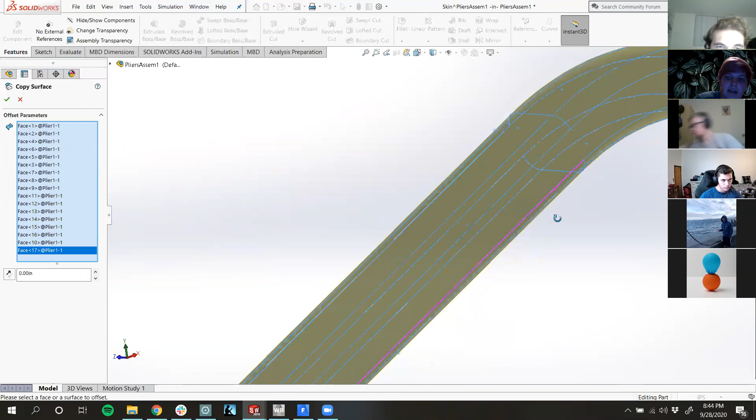Where's that surface? I think that might be all of the surfaces, so I'm gonna click on that one. All good to go. You'll probably want to pay attention for this part. I'm gonna go over here in the right part.

Pretty circle. Appearance, solid color, let's make them red. And you drag it, and then you say I want the whole part to be red, or if you want the feature to be red, you know, you do you.

Okay, so since these surfaces were continuous, it did that, and I couldn't find a way around that, so I'm gonna do the thing that you should ideally never do. I'm gonna make an arbitrary shape and then cut extrude through the whole part. So it's a god-awful thing to do, but okay, so we're gonna make a sketch.

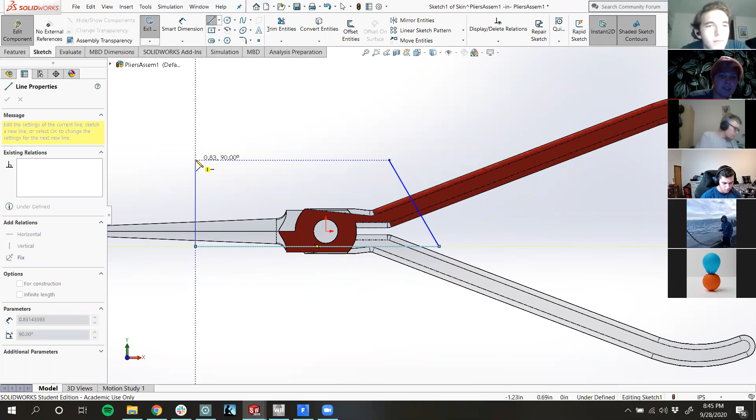We want... yeah, okay, shape, shapety shape. I'm just gonna make it really big in case. This is not what you should do ever. No, wrong one. I'm getting pretty tired, how about y'all?

But we're almost done, we're so close. Okay, I can't access extruded cut for some reason. Oh, also I need to thicken that, I don't remember how to do that.

Okay, insert boss base, thicken. Thicken parameters, this whole jazz. Oh, that was thick, that's too many. Still pretty thick.

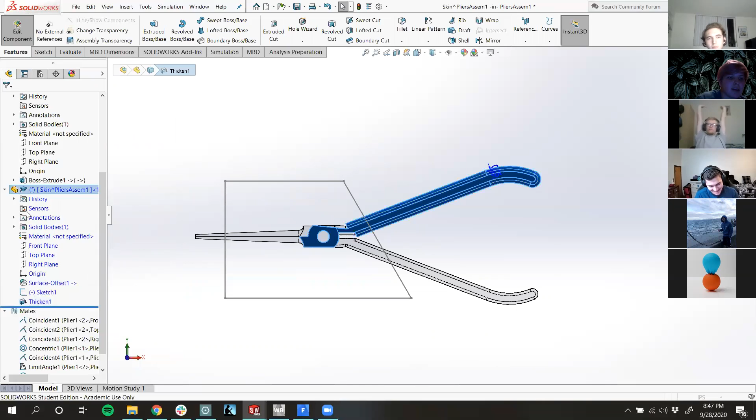Merge result, why the heck not? I don't know what it was doing before. Now we can access that extruded cut, and we're gonna use this sketch, and go through both directions, because these are bad habits here.

Now I'm actually gonna define this perpendicular. Oh, no, that's flat. I've got to move. Wait, why can't I?

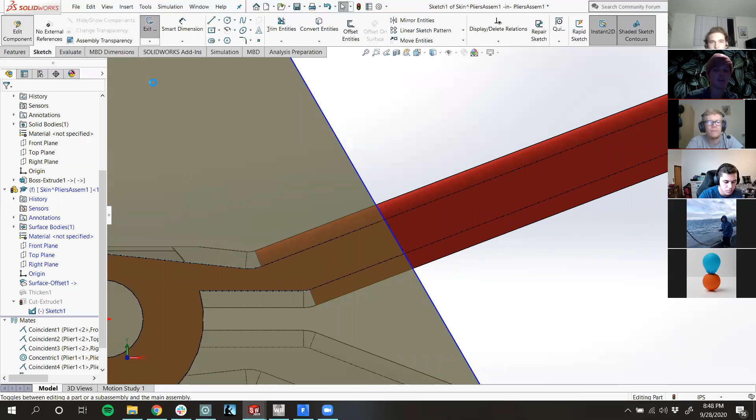Maybe that'll work. Oh, anyway, I was going to set that perpendicular to that, but I don't even care anymore. Because it's functional and you can modify things on your own time. You can also make the second one on your own time.

Today's been a long day. Do we have any questions before I leave and eat food for the first time? Yeah, quickly, could you go over this whole thing again? Yeah, Laird, you can rewatch the video. Yeah, I had to leave at the first sketch, so I'm going to have to rewatch this.

Thank you, Becca. I like how it looks. It definitely looks different than the first one. That's what you get when you're winging it. I think I messed up, but that's okay. It's good enough. Good enough for something.

Got some practice. Oh yeah, throw that on your featured works on LinkedIn. Because you can put images in there. Nobody does that, but I have a whole bunch of images. Did y'all know about that?

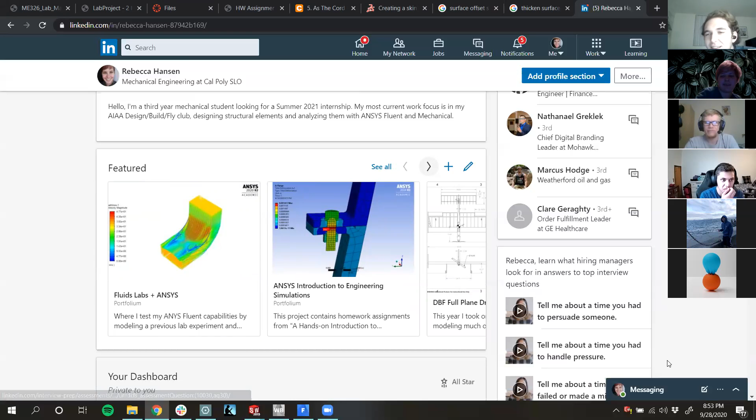Okay, well, that's all I got. Thank you, Becca. What thing did you do to make the pin again? I was vibing when you said that part. For the pin, I was in assembly, insert new components, new part, and then put it there and reference it. Okay, gotcha. Roger that.